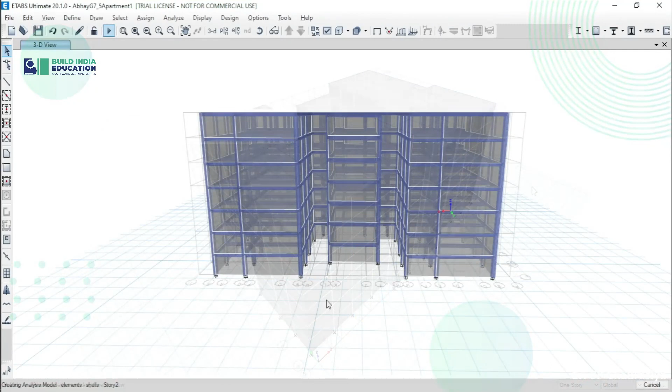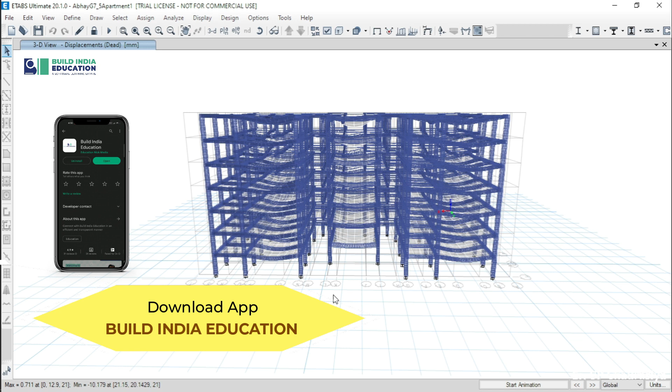In this video, we are going to talk about things you should know or have before we get started. First, this is not a theoretical design class. I assume you are familiar with the basics of manual structural analysis and design of simple structures with simple loading.

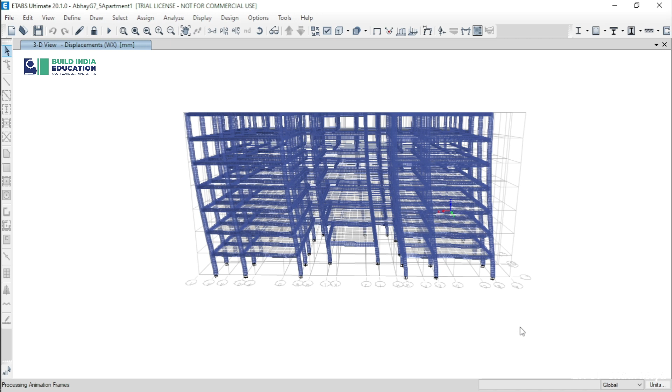For example, simply supported beams, continuous beams, etc. I'm also going to assume that you have a basic understanding of reinforcement detailing for structural elements like beams, columns and slabs. In the first few chapters, I'm going to explain everything to you, considering you have little to no working experience with ETABS. However, as we progress through the course, I will switch things up subtly so that I can show you the huge potential ETABS holds.

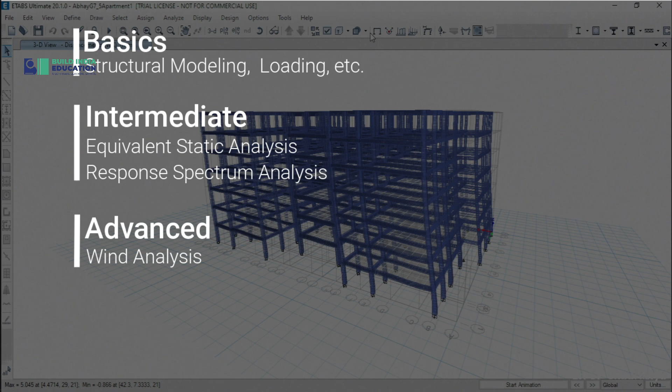I'm also going to cover some simple to advanced topics like seismic analysis using equivalent static analysis and response spectrum analysis, and also wind analysis in this course. I will also show you how to use those analysis results to design your structure using simple detailing of structural elements for optimization in design.

Throughout this course, I'm going to use relevant Indian standard design codes which you might already be using in manual designs.

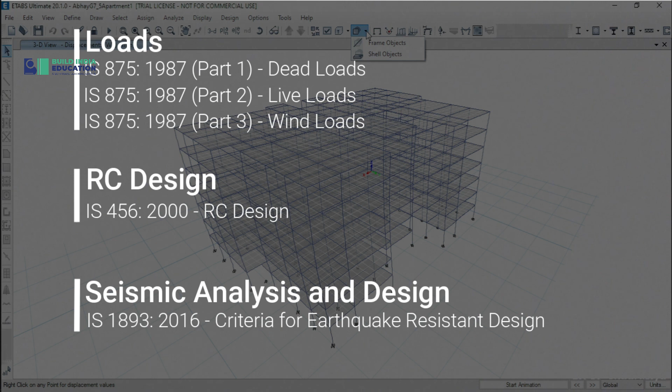Like every other tool, ETABS is also a tool of practice, and therefore I recommend that you make use of the exercise files that are supplied to you so that you can follow me throughout the course.